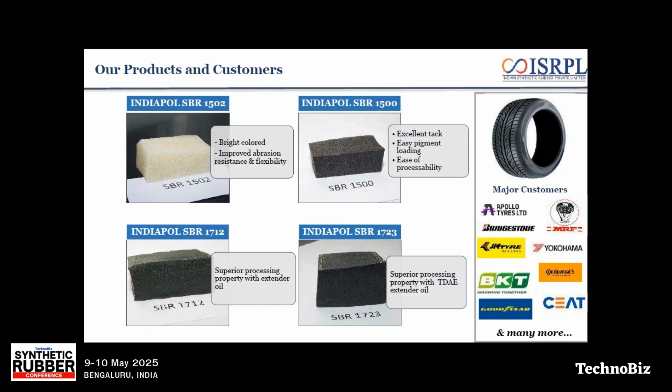Before we get into the subject, I would like to touch upon how synthetic rubber came into picture. We know that necessity is the mother of invention. This is what happened during World War I and World War II, when there was a scarcity of natural rubber. The supply of natural rubber got restricted from Asia into Europe and the US. There were no options, and people started working to see if they could produce some material similar to natural rubber, which could be used for making tires and other rubber products.

The first product developed was a polymer called polyisoprene, and later on other synthetic rubbers like SBR, PBR, and butyl rubber were developed. Most inventions actually happen when there is a problem - we have other good examples like penicillin, which was also developed during World War, and the microwave we use for cooking food, which also got developed during that time.

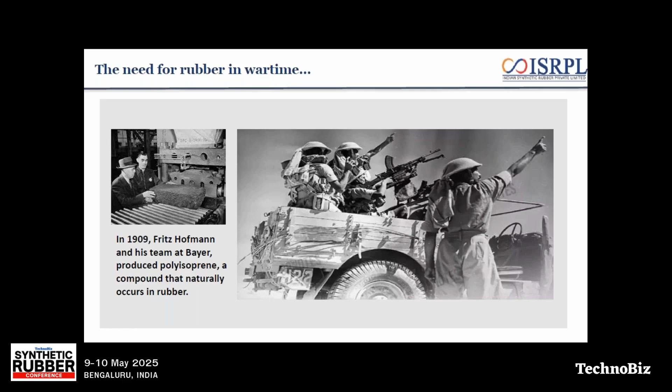Over the years, a lot of development has happened, and now we have different types of rubbers being used for various applications. Some of these are SBR, PBR, EPDM, butyl rubber, NBR. Apart from that, chloroprene, acrylic rubber, silicone, isoprene. So a lot of different types of rubbers are used for various applications.

For the sake of simplicity, and because if we look at the volume of these various types of rubbers, SBR, PBR, EPDM, butyl, and NBR are widely used, and major volume actually comes from these types of rubbers. So when we are talking about the numbers in subsequent slides, we will basically be talking about these major rubbers.

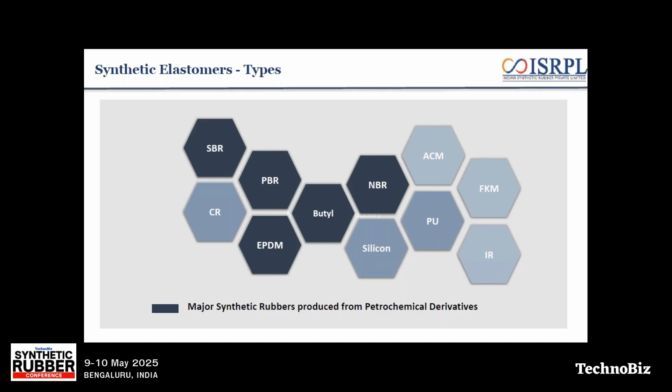Also, these rubbers are basically petrochemical derivatives, like silicone rubber. It is not a direct petrochemical derivative - of course upstream if you go, it is linked with petrochemicals. But these rubbers are mostly direct derivatives of petrochemicals.

So the basic question is, when we talk about synthetic rubbers and the demand, where exactly does the demand come from? The major demand for synthetic rubber comes from the automotive industry. I think almost 80 to 85% of the consumption of synthetic rubber is from the automotive industry. Tires, of course, is the major consumption. Apart from tires, there are various other components made from rubber. So that is the biggest segment from where the demand comes from.

Apart from that, construction - we have rubber seals for glass channels. Then we have NBR latex for healthcare products and other elastomers used for various applications in healthcare. Then footwear is another major area which is coming up, where consumption is going up significantly. A lot of footwear right now - of course some have shifted to other polymers, but still, footwear is a major sector consuming good quantities of rubber.

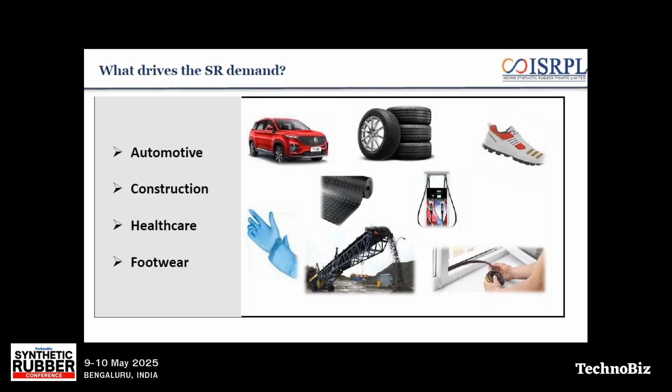21.6 million tons, and consumption is just 16 million tons. But again, since we are attending this conference on synthetic rubber, if we look at natural rubber and synthetic rubber, the usage of synthetic rubber is more than natural rubber - it's bigger than natural rubber.

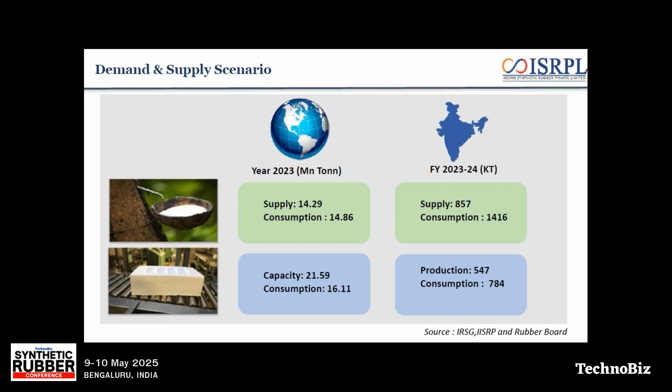There are a lot of new capacities which have come up, including styrene butadiene rubber SBR capacity of ISRPL. Then we had Reliance, who added SBR capacity. Apart from that, they also enhanced the PBR capacity. And recently there is addition of butyl rubber capacity. So all this has added up to this increase in production, whereas consumption has gone up from 553 KT in 2015-16 to 784 KT in 23-24, which is almost a 42% increase.

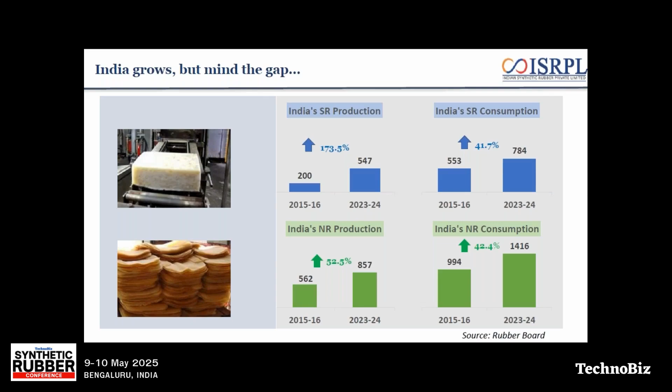But again, I would like to draw your attention to some other numbers in this slide. For example, in case of synthetic rubber, if we look at the production in 23-24, we are very close to the consumption number from around 10 years back. In 2015-16, consumption was 553 KT, whereas production after 10 years is 547. So we are in a way 10 years behind the demand curve. That's what is important, and I think we need to work on that and see how we can increase the availability of synthetic rubber as well as natural rubber. Same is the case with natural rubber.

Now let's have a look at the global capacities of synthetic rubber. We will be covering major synthetic rubbers, which is SBR, PBR, IR, then butyl rubber, and EPDM.

There is increase by 10 million tons over last 25 years in terms of capacities. And we know there is overcapacity at the moment, which we will cover in subsequent slides. The forecast for next 3 years is that we will continue to add more capacity, so overcapacity is going to increase. Why is that? Is to be seen.

It is because synthetic rubber capacities are always planned in advance. In India we are behind the curve, but globally we are ahead of the curve. These are generally planned in line with the upstream - we have to have a refinery, we have to have a cracker. Crackers are basically planned not for synthetic rubber, but for ethylene and propylene, mostly for plastics and olefins, and we get the C4 stream from that, which is utilized for making butadiene and downstream synthetic rubbers. So it's basically the demand of ethylene and propylene which drives the capacity of synthetic rubber. That's the reason we have overcapacity globally.

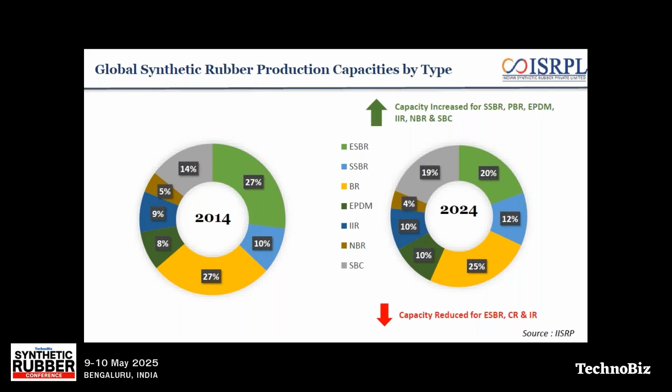Now let's look at how the capacities have changed over the last 10 years and what is the forecast available for the next 3 to 4 years. In case of ESBR, as we have seen, the capacities have rationalized and been reduced. This is basically because the industry is shifting from ESBR to SSBR, as the demand from the automotive industry is changing and the performance requirement from the tire industry is changing. Therefore there is increased usage of SSBR, and some ESBR is getting replaced by that.

In 2014, Korea used to be the major producer and exporter of ESBR. We have seen two major players, Kumho and LG, reduce their capacities. In fact, LG decided to exit from ESBR, and Kumho decided to reduce its capacities, actually changing one of their lines from ESBR to SSBR. So a major change has happened in Korea.

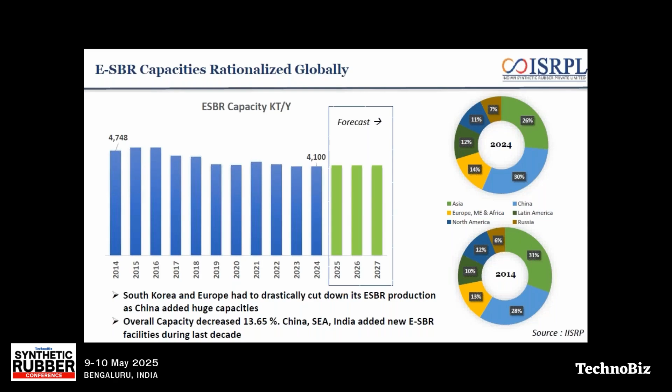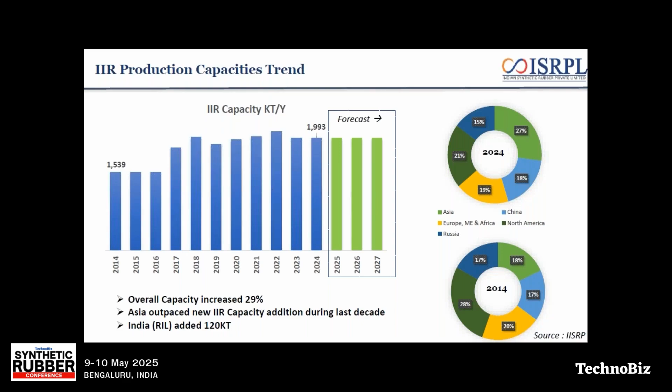During my interaction, somebody was asking me if there are any plans for India to add a new EPDM capacity. But I think it's difficult at the moment, given the oversupply in the global market. Because once you plan for such an investment, it's a huge investment, and you need the downstream industry to absorb that production. So right now, if we see the demand in India, it does not justify the new capacity, and that's the reason it's very difficult at the moment for India to have an EPDM plant.

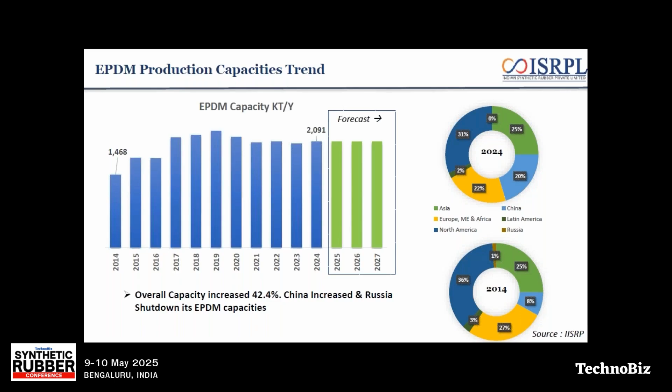As I mentioned, butadiene is an important feedstock for synthetic rubbers. So why is that? Let's have a look at how the demand for butadiene has changed in terms of downstream derivatives, which basically consume this feedstock.

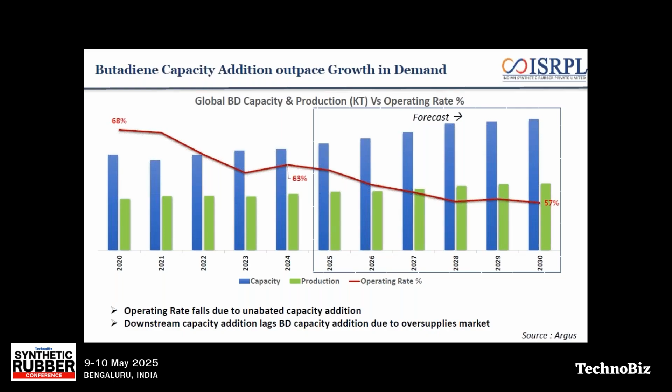We are seeing a lot of changes in the demand from the downstream consumers, specifically from the tire makers. We are shifting from internal combustion engine to electric mobility, or EVs. That shift is taking place, and for that the basic requirements are also changing in terms of rolling resistance, fuel efficiency, noise, and other parameters. There is a shift happening, and as we have seen, ESBR demand is going down and SSBR demand is picking up. Again, in case of PBR, demand for nickel-based catalyst is going down, cobalt-based catalyst is going down, demand for NDBR is going up. So all that is happening.

So people are looking at products which are more heat resistant - feedstock, basically the rubber used for making tires, which produces lower noise, vibration, and lower rolling resistance.

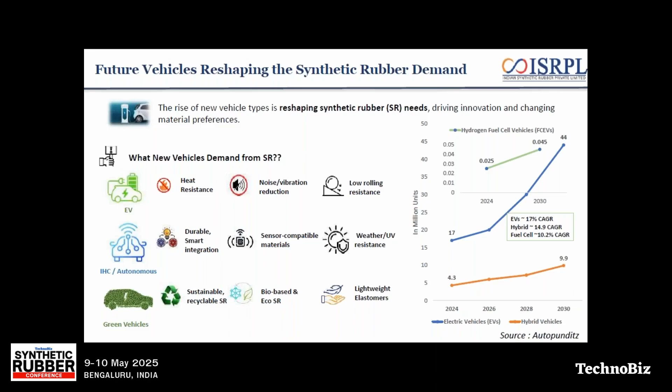Apart from that, there is also a shift happening towards sustainable raw material. So when we talk about sustainability, it is recyclability, reusability, and of course the feedstock based on renewable sources, that is bio-based material. And since BD is the major feedstock, so a lot of...